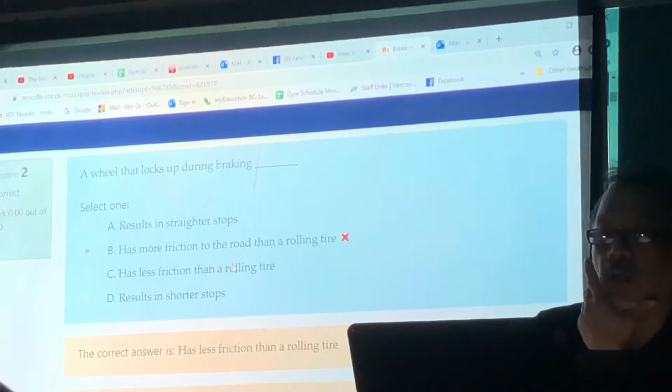Okay? A wheel that locks up during braking has more friction to the road than a rolling. Wow. You good? Good. The reason why you lock up is because you have less friction. You good? Friction is the one that stops the vehicle, right? Correct? But he's good, this mechanic.

If the weight of the car doubles, kinetic energy will double. What happened to speed? Double. Weight transfer during braking is caused by inertia, right? Inertia. Okay, here we go. Typical hanging brake pedal is a second class lever.

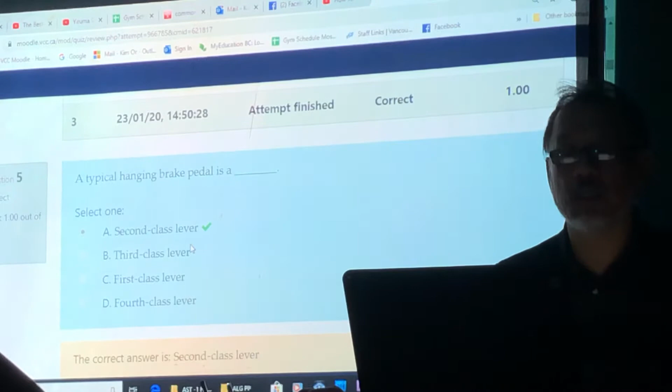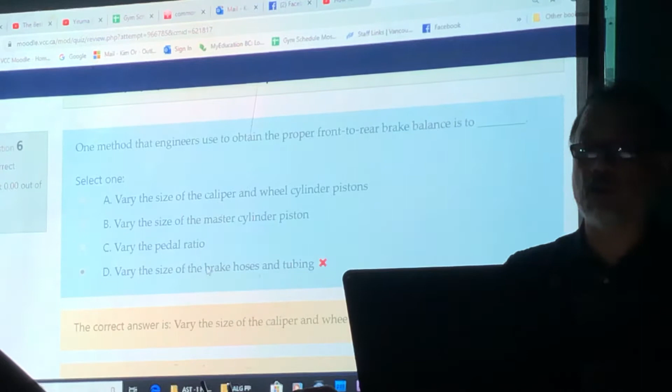Okay, hanging brake pedal. One method engineers obtain a proper front to rear brake balance is to vary the size of the caliper. As bullshit. Good. Does that make any sense? Okay, they play around with the size of the caliper and the wheel cylinder pistons. You guys good?

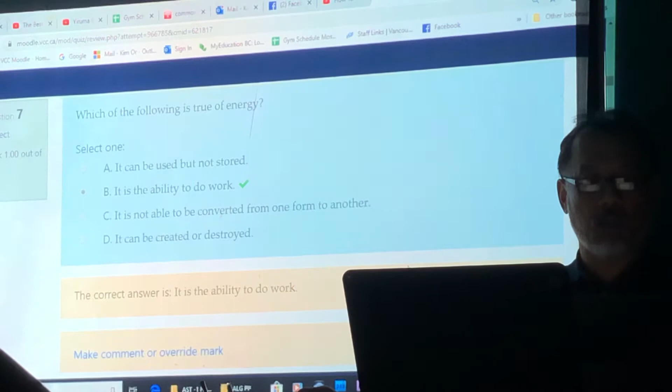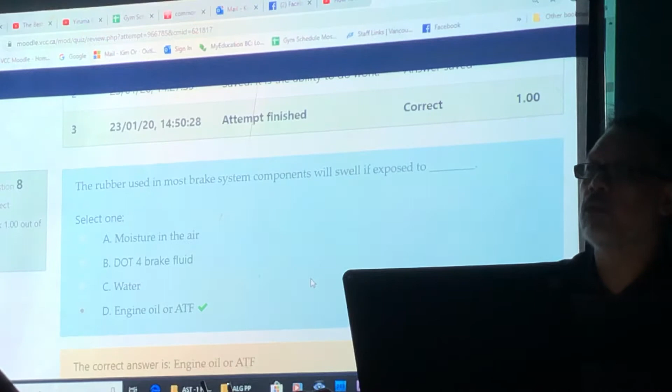Energy, the ability to do the work. You good? The rubber in most brake systems is exposed to engine oil, right? You can tell, right, when it swells? When cleaning hydraulic brake parts, use...

What the fuck do you use? Your piss? Yo, I don't. Go ahead, don't worry about it.

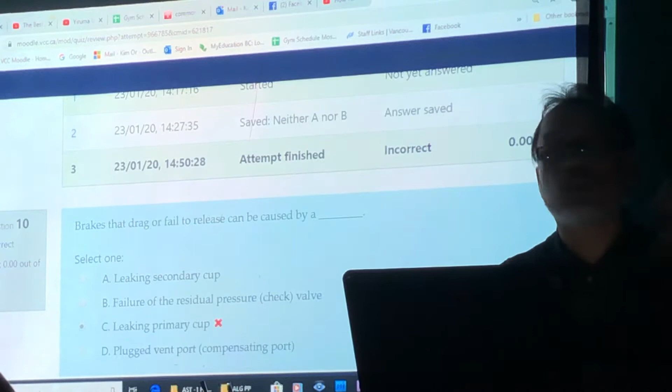I've heard enough. Brakes that drag or fail to release can be caused by a leaking primary cup. Whoa. Yeah, I'm telling you right now. By the way, just so you know, I'm not gonna lie to you, you guys are gonna have the majority of the questions in brakes. Okay, so this is basically 4. The tools ones you guys have been doing really well, they only have like 2, 3, 4, 5 questions. But the brakes, they're gonna load this thing up.

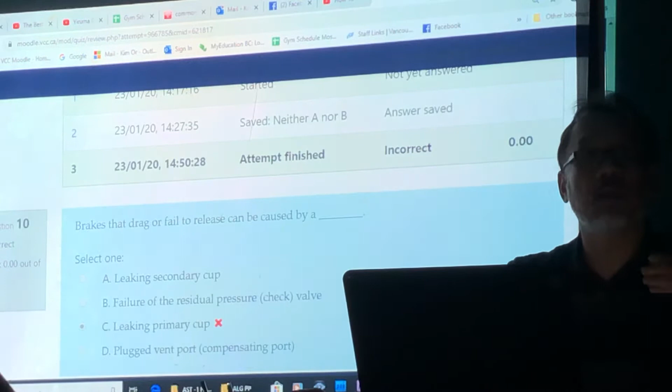What's the most questions there? Brakes and steering, suspension. How about the electrical one? Electrical. Huh? Electrical, I studied that. It's not gonna be as much as these ones. How's that? Ah shit, I studied for that. Okay, let's go. You study? Yeah. Wow. Bro. Okay, let's go. For 1 minute. You got this. Drag, fail, fine. Got 2.

Plugged compensating port. You good? How many high pressure lip seals are there in a typical master cylinder? 3. Ones that face this way, and faces that way. Self-applied brakes can occur if... good, and see, you know this one. Oh, obviously you must have guessed, no. Okay?

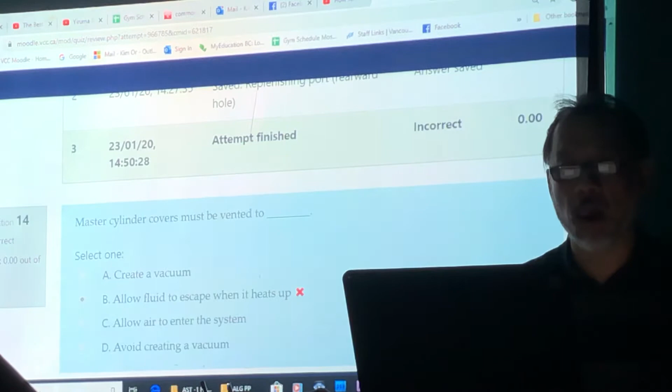If the brake pedal linkage is not adjusted properly, brake fluid may not be able to expand backwards through the what? Oh, please. 50-50. Master cylinder cover must be vented to allow fluid to escape when it heats up. What do you think? No. Create a vacuum. Huh? Prevent creating a vacuum, allow air to enter, right? So they can avoid creating a vacuum.

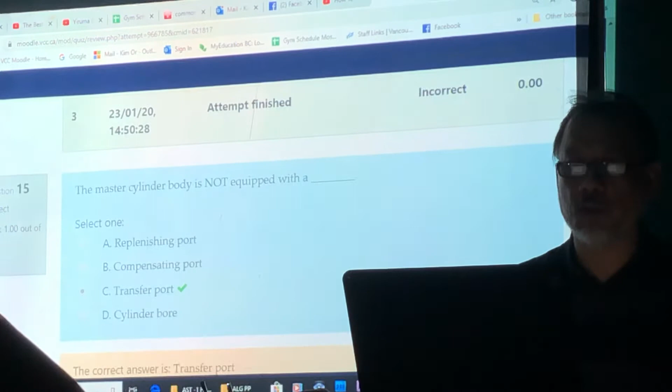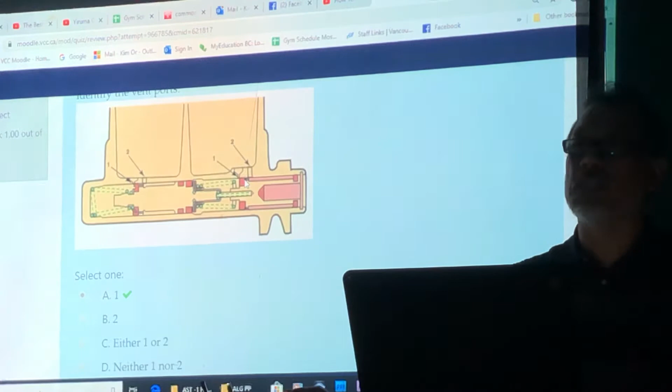This is the one that you guys gonna have to pay attention to. Remember I told you, you guys better make sure you guys know the names for these, 1 and 2. Do you remember what I talked about? When your brakes are in the what? Stationary position, it has to be between the 2. Does that make any sense? Okay. Okay. Are they brake apply? Correct?

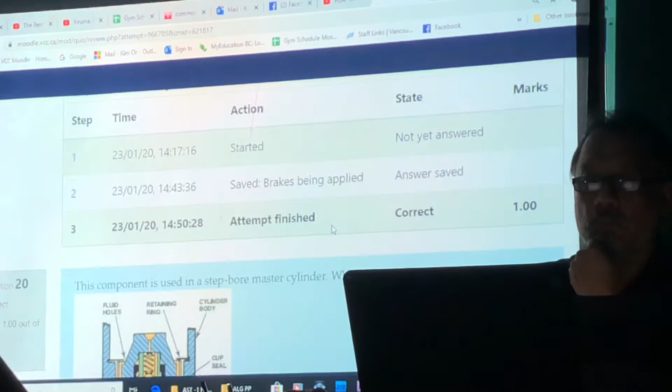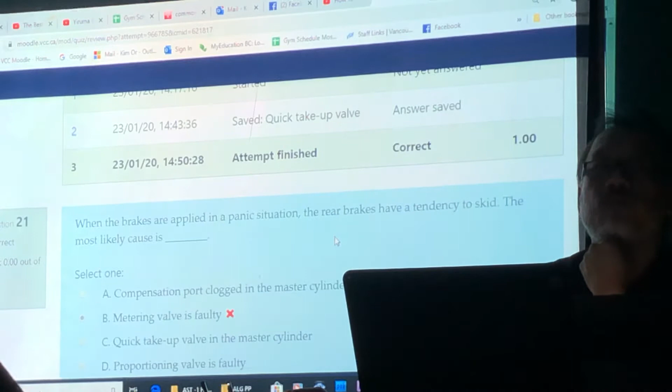What's this one called? Huh? Quick take-up. Oh, I fucking guessed it. Shit, huh? That's smart. Go. Panic situation. Proportioning valve. Huh? Fucking smart, man. Residual check valve. Residual check valve.

Anti-lock. Hmm? Used on anti-lock brakes? Used only on anti-lock brakes? Or to keep air out of the brake lines. Maybe. Under the tubing seat. Oh. What is it for? This is for wheel cylinders.

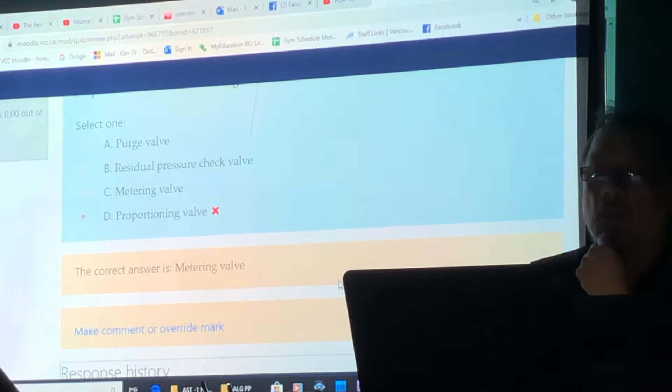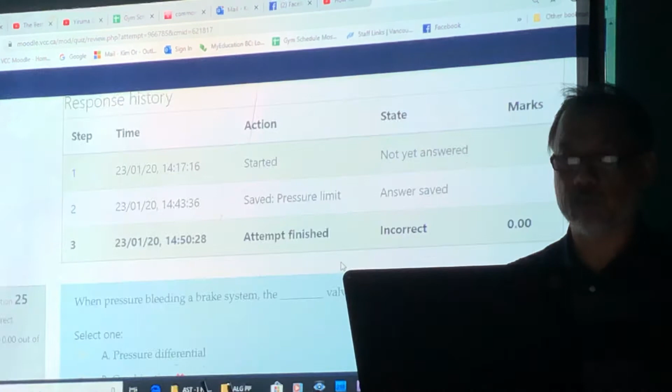When brakes are applied lightly at low speed, what type of valve keeps the front brakes from locking? Metering valve. The point at which the proportioning valve limits pressure to the rear brakes is called the... pressure limit. Limit point. Huh? Is it a limit point? Yeah, split point. Oh, fuck. When pressure bleeding this system, the valve must be held open. Which one? Proportioning. Metering.

Do you guys understand it a little bit? Huh? When you do some reading tonight? Yeah. Okay.

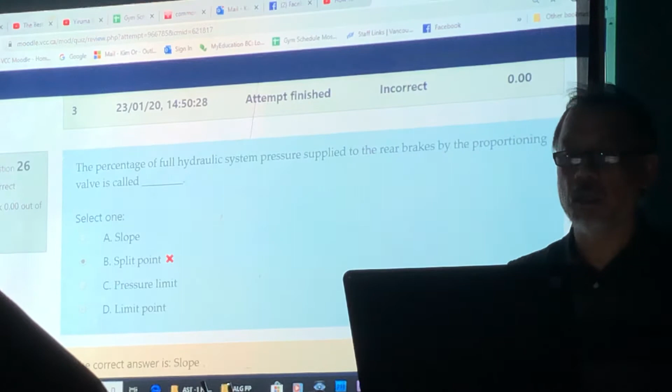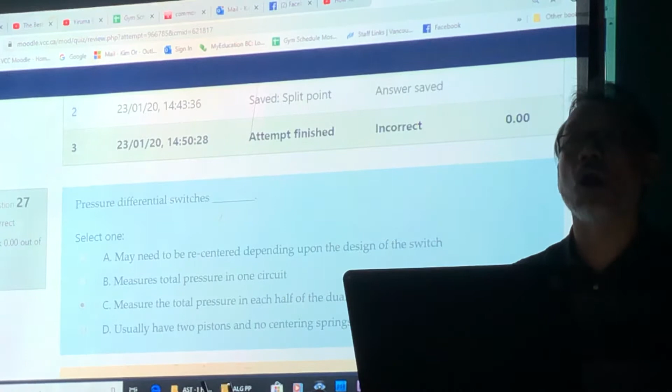Percentage of pressure at the rear brakes is called a slope. Pressure differential switch. What is it? Pressure differential switch. Differential, 2 piston. This is when something failed, right? Maybe the rear side. Right. Recenter. Differential between front and rear, right? Both A and B. Testing with a gauge that reads a maximum of 2000 psi.

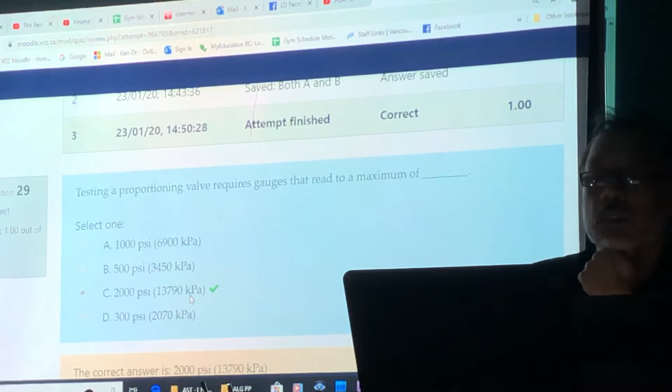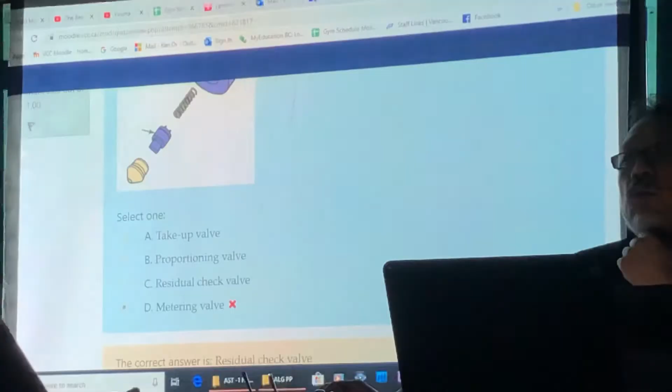That's a residual check valve. Residual check valve. Okay, this is if you have what? Wheel cylinders, right? Residual check valve.

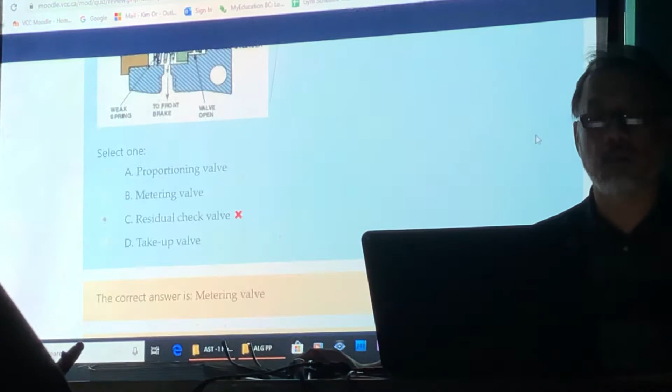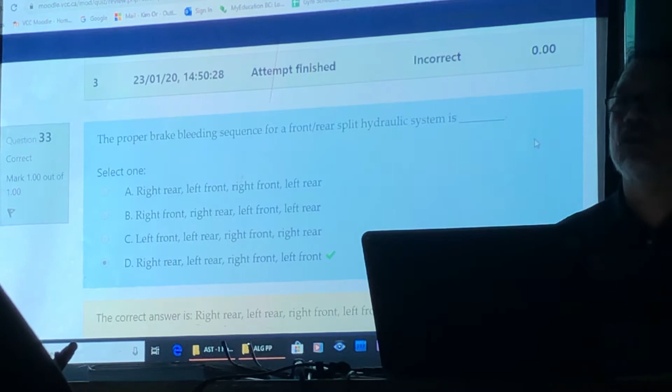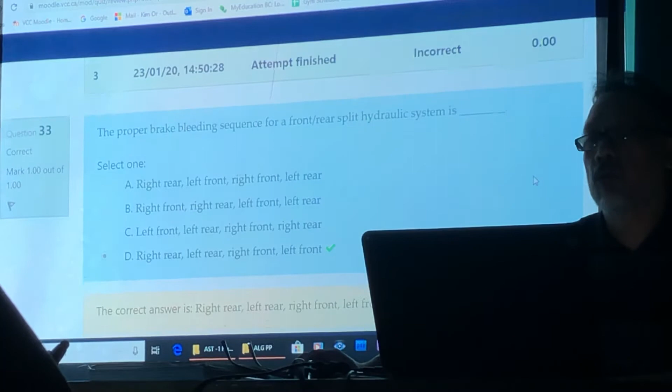This one is metering valve now, right? Metering valve. This, you guys okay, front rear split? We talk about which one do you bleed first, right? Wouldn't you wanna do it furthest away from the ABS? Huh? Furthest away from the ABS? Nah, do this for the farthest from the master cylinder. Right rear, left rear, right front. It's always like that, farthest from the master cylinder.

Why shouldn't a service tech depress the brake pedal all the way down when you're bleeding the brakes? The seal cup can be damaged. 200 IQ. Why should the bleeder be open before pushing the caliper back in the piston bore? To get rid of any trapped air? The answer is, to get rid of any trapped air, man.

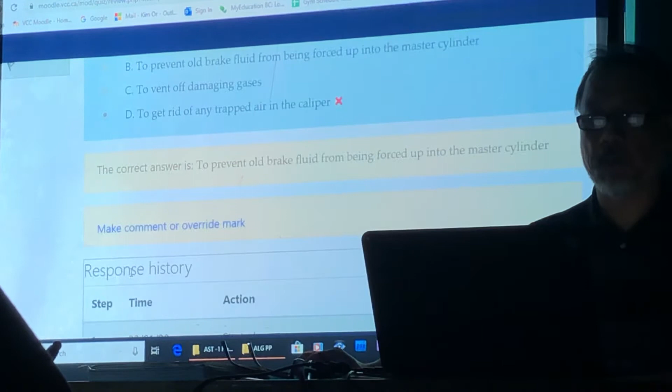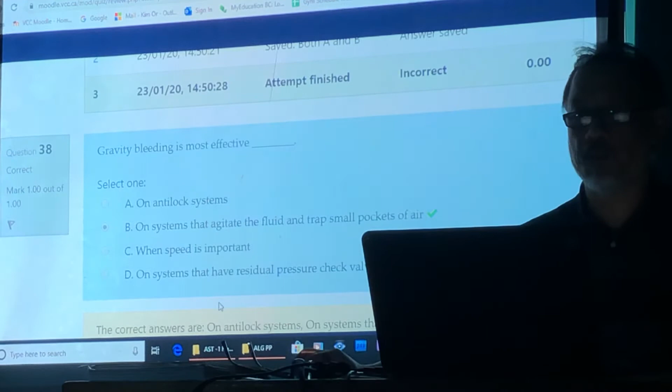In the overall bleeding, which part should be bled first? Master cylinder, and the rest? Vacuum bleeding. When we talk about the pump, the handheld one? Gravity bleeding. Gravity, can you tell me what gravity bleeding is? Jack the vehicle up, you put fluid in the master cylinder, and you release the bleeder screws, and it'll come out. Pressure bleeding.

What's he doing? Bleeding. What type of bleeding, sir? The master cylinder. What type of bleeding? What's it called? Vacuum. Vacuum, that's a vacuum pump.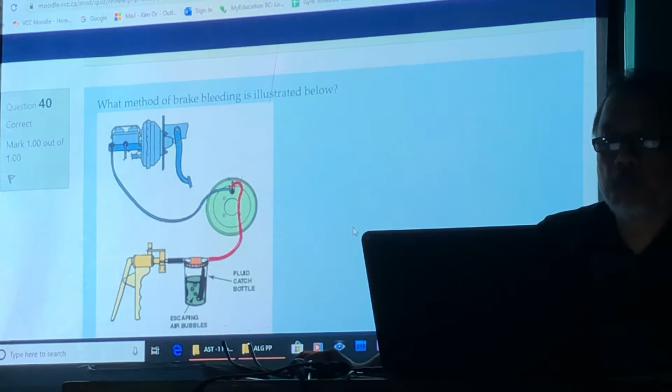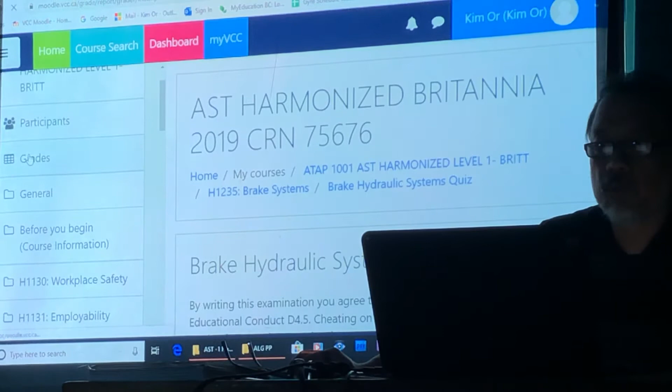Yo, I was about to say that. Why the fuck you said that, though? What? Why you thinking that? Done. Finished. He said that. Okay, cool. That's one. Raheem, so far you're doing really good right now. Thank you. Means a lot, you know?

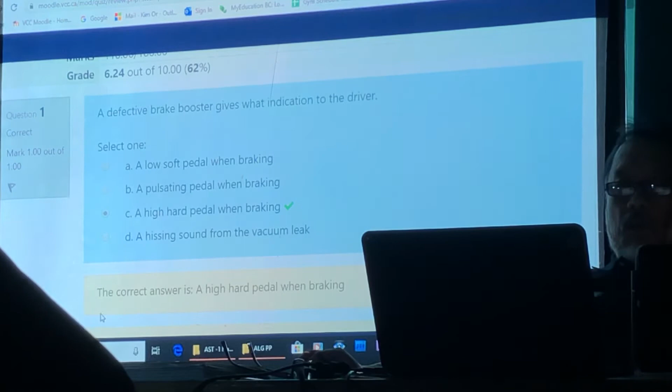You know something, since we don't have much time, we have to go right to the final exam now, okay? So we did the brakes already. Is that brakes final? Right here. Oh, good job, 62. That's great, that's better than 50. Okay, go. Let's go right to the final. A defective booster, go. Very good. A high pedal when you're braking.

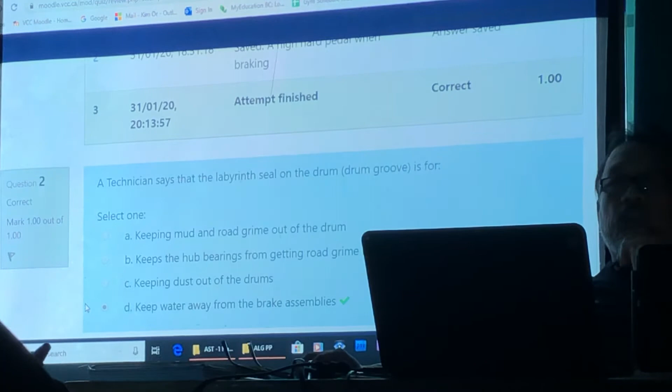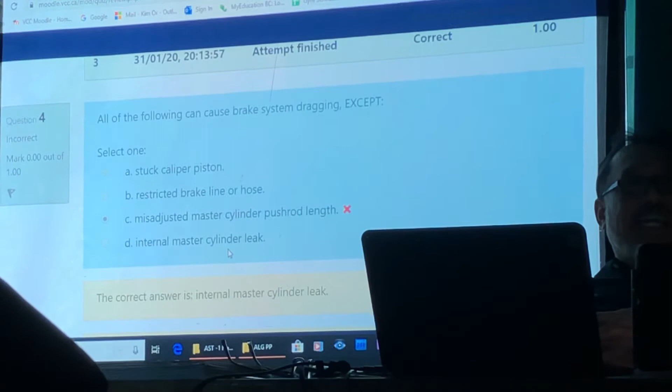The labyrinth seal keeps the water away, so somebody paid attention. Okay, labyrinth seal. I did teach you something, I hope? Yep. Good. Air, spongy, right? Good. We can skip that one, right? Air, also a little spongy. All the following can cause brake system drag except, okay? Except internal master cylinder leak. Good. Internal master cylinder leak.

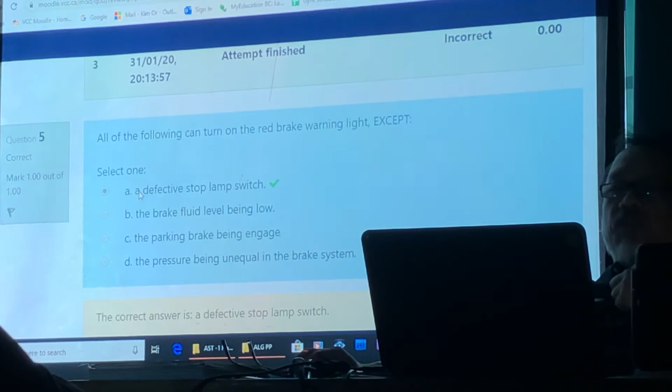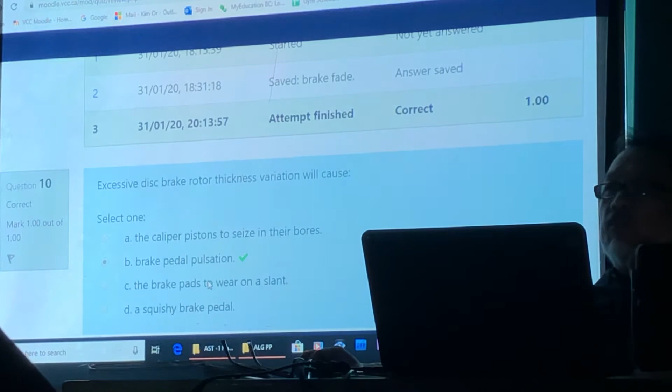When the caliper has been removed from its mounting bracket, the piston is held in its bore by... Smart, man. Genius. A brake rotor too thin cannot be handled, as we'll experience brake fade, right? Excessive disc brake rotor thickness variation will cause brake pulsation. That's why you measure the parallelism. Okay. Outside diameter, right? Brake line? That was a review one, was that?

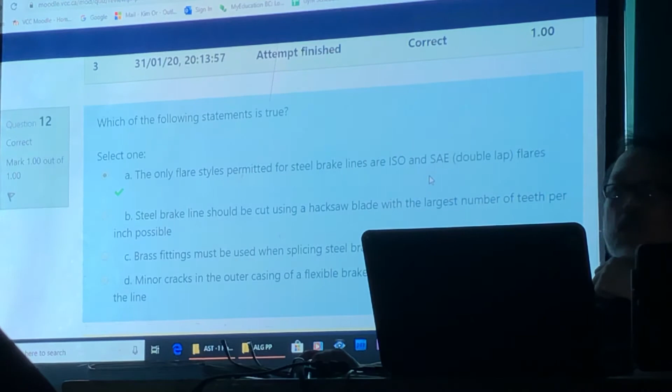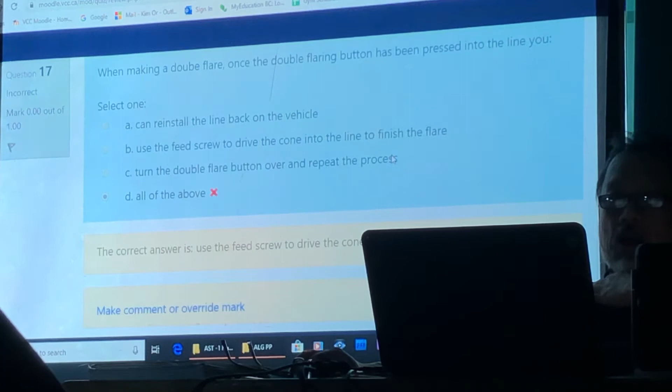When making a double flare, holy cow, you should turn the double flare button over and repeat it. Wow. You can reinstall the line back. Wow, okay. That's smart. Which of the following methods should be used to retract the piston? Special tool provided by manufacturer, that's the best one, okay? Even though you have used all of them before, the best answer is use the special tool provided by the manufacturer.

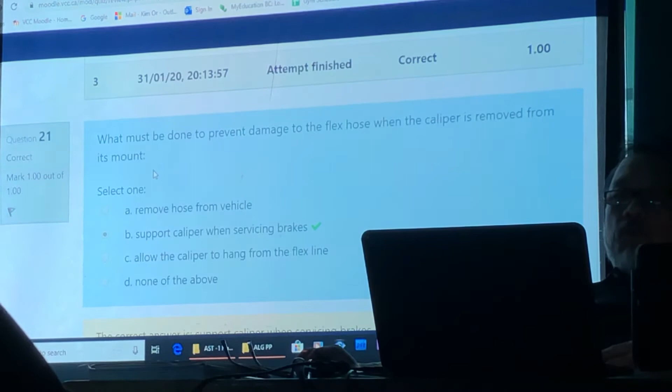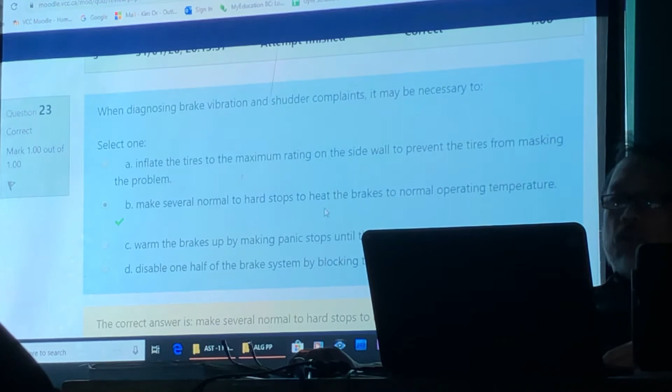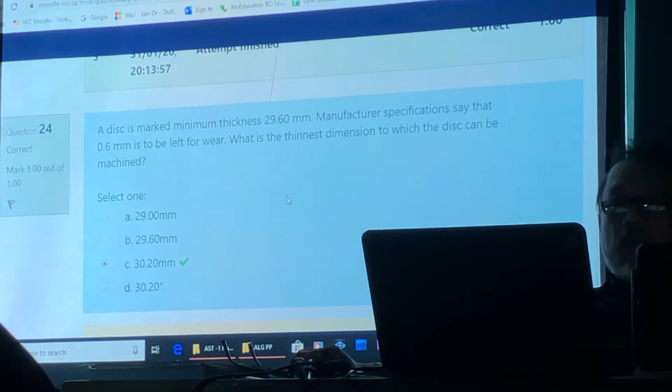The function of the rotor key, correct? Simple one. Disc brake, self-cleaning. Prevent damage to flex hose. Good. Road test, check, all of that. So overall, the simple ones, the procedure, you're pretty good. I think when it comes to the detail stuff, you kind of slacked a little bit. Okay. You need to get the vehicle to operating temperature. Oh, good. Well, at least you can do math. My girlfriend Google hooked me up.

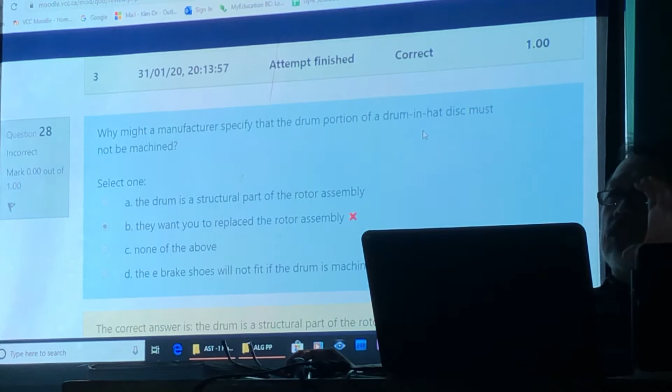So you guys know that you do not machine the drum in the hat, right? If the handbrake section wears out, correct? Did you guys know that in the perfect world, in the drum, do you know what I'm talking about, the drum in the hat? Do you know what I'm talking about, drum in the hat?

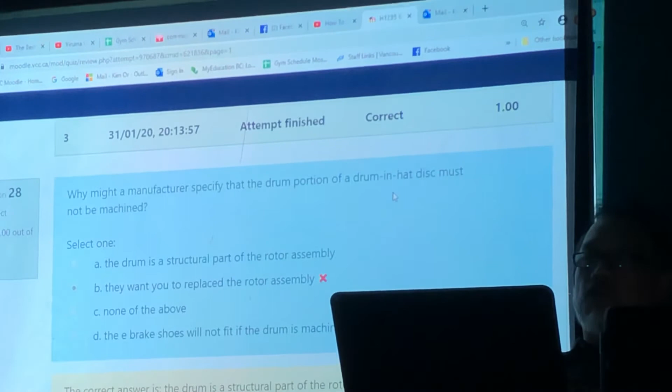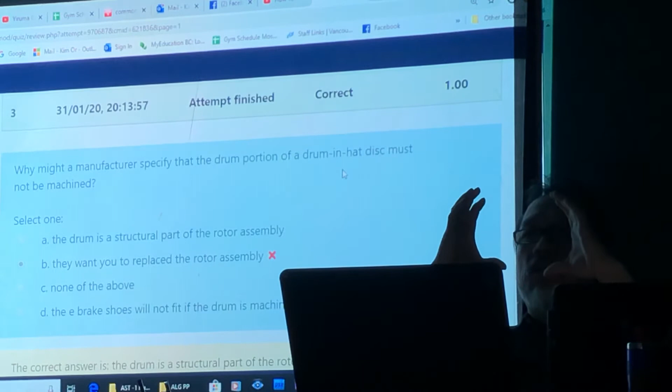What's it called? When you use a regular caliper, how do you lock up the rear rotor? E-brake. Yeah, using an e-brake, but how does it work? With a cable, if that's just a regular caliper. Yeah, okay. So inside the rotor, you have a drum in there. Oh, you're talking about the... So it's like disc brake. This is the rotor. It's actually got a drum. They call it drum in the hat.

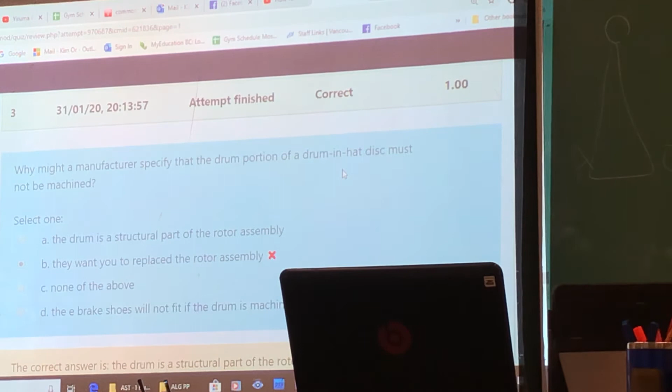So this drum here is not meant to wear out. What causes it to wear out? People drive around with what? The e-brake on. Handbrakes on. That's why this thing here is not meant to be machined. If you drive correctly, should the brake pads in here be worn out? It should be brand new for the duration of it. Because all you do when the car stops, you put what? Handbrake, this one comes out, locks it. Does that make any sense? Good job.

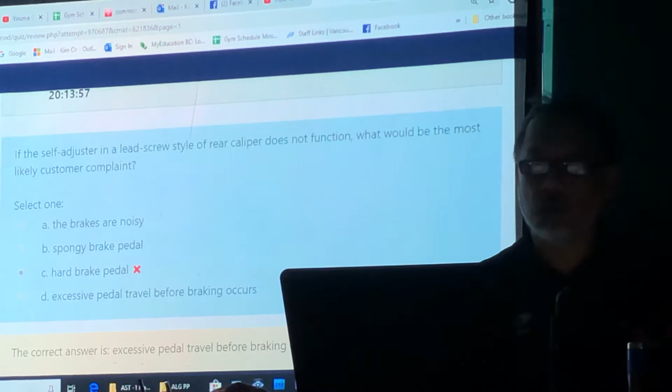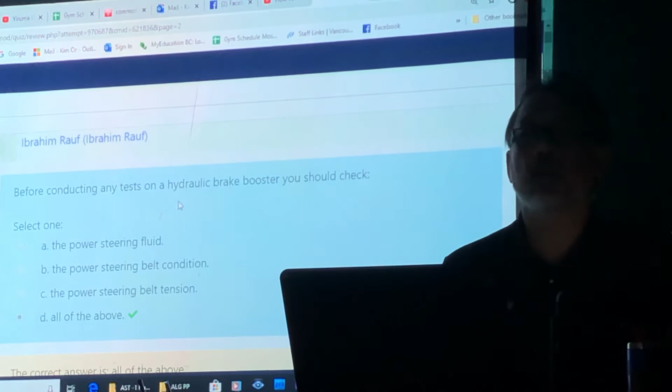Okay. Does not function. Excessive pedal, right? Vacuum and hydraulic. As a brake booster, we have two types. Which is the most common? Vacuum booster is the most common. What's the name for the hydraulic brake booster? What do we call it? Called hydro boost, right? Hydro boost.

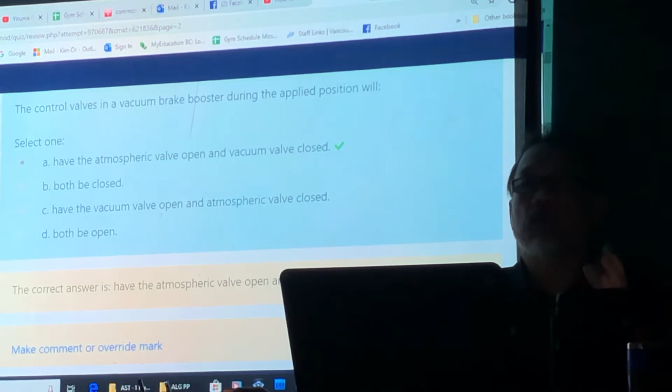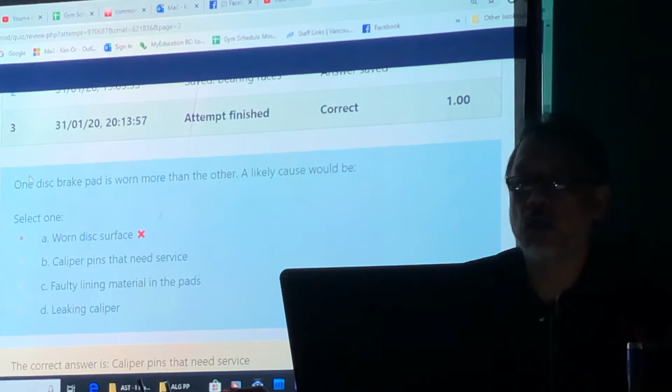Remember I showed you the animation about the vacuum port and the atmospheric port? You need to study that. I just don't have the time to teach it. Disc brake pads wear one more than another. The likely cause could be a caliper that needs servicing. Does that make any sense? Stuck?

I need to finish the whole thing. I'm assuming that when you got the right ones, you're paying attention. I'll go to the ones that he's wrong, okay? I have to get this done by 12. That way I'll give you an hour and a half to mount your engine back. Okay, good.

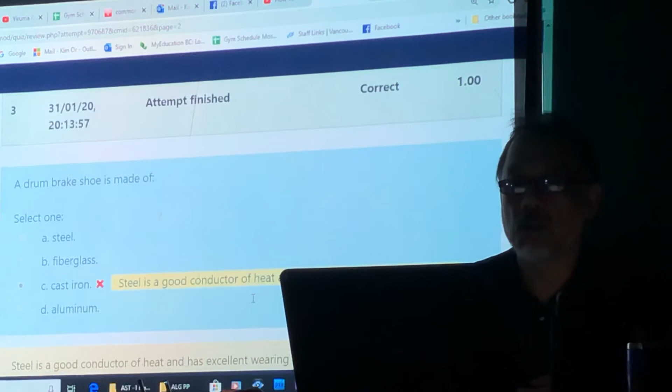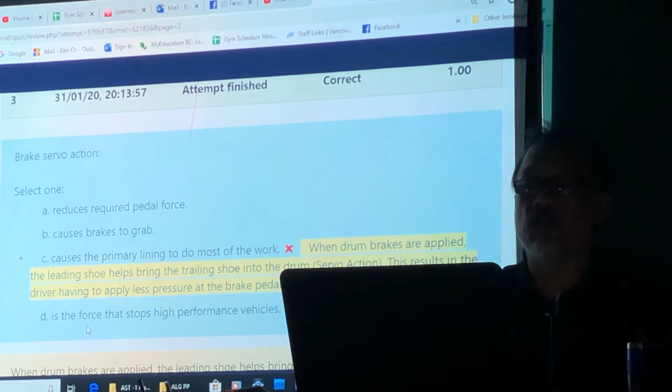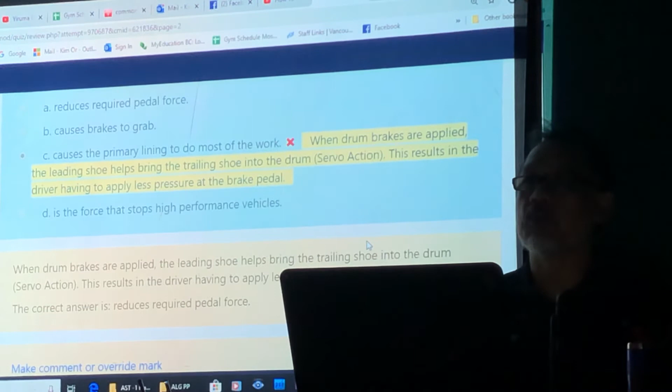Drum brake shoes made out of steel. The brake shoe is steel, but the drum is made out of what? Cast iron. Brake servo. I'll let you read it. The purpose of the servo is so that the primary can help the secondary. Where's the anchor pin on a servo? Top. Good.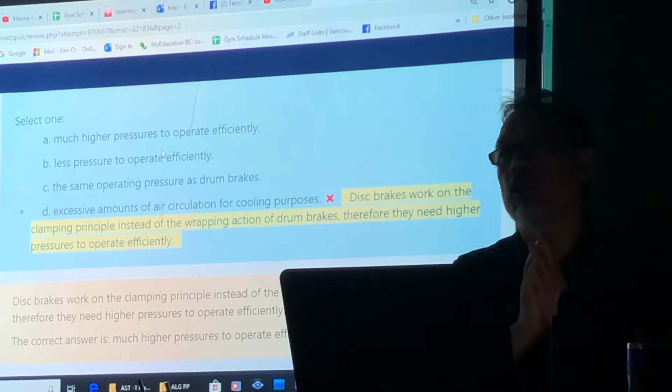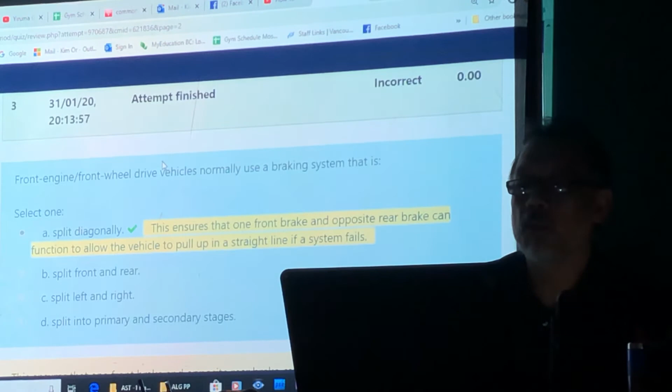Compressed air, dangerous to the health. Disc brake needs much higher pressure to operate, correct? Because of the surface area of brake pads versus brake shoe. And because of that, we need a power booster. So when you get it right, I'm gonna speed it up. You just have to go review those booster, okay?

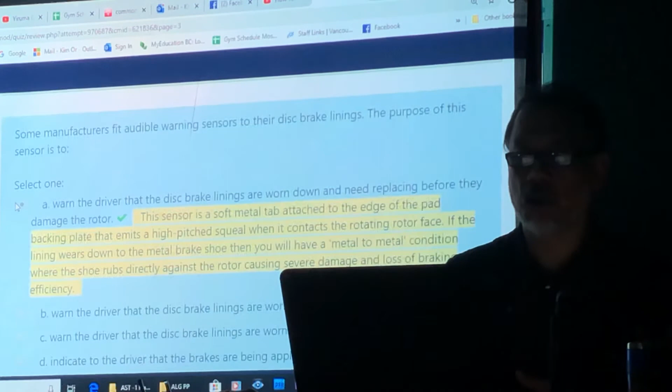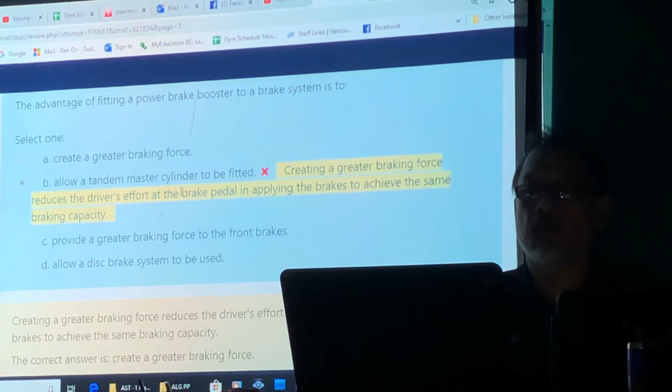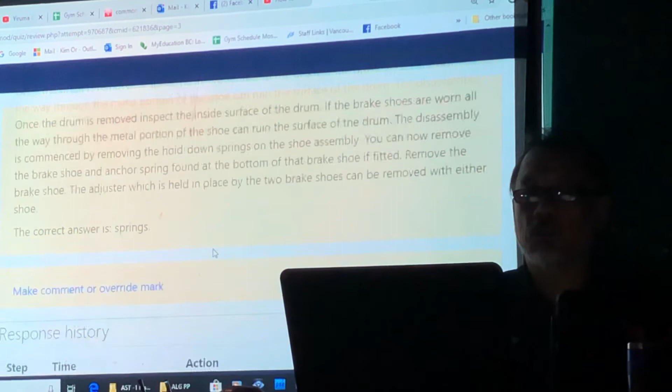Greater power brakes, greater force. The backing plate supports basically all of them. Brake pedal. I'm just gonna go through the stuff that he got wrong. Proportioning valve. Again, these are all proportioning valve. I want you guys to go through this yourself, because I need to go to suspension too, gentlemen.

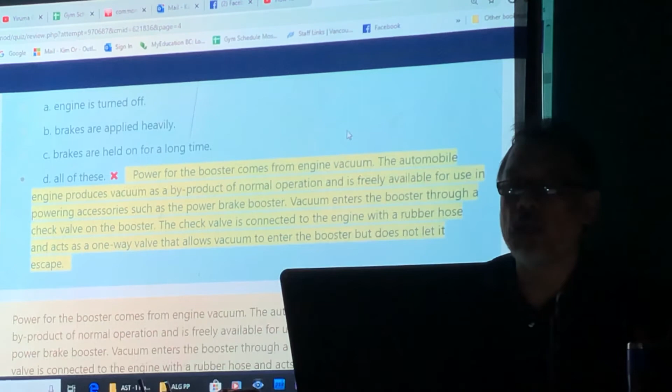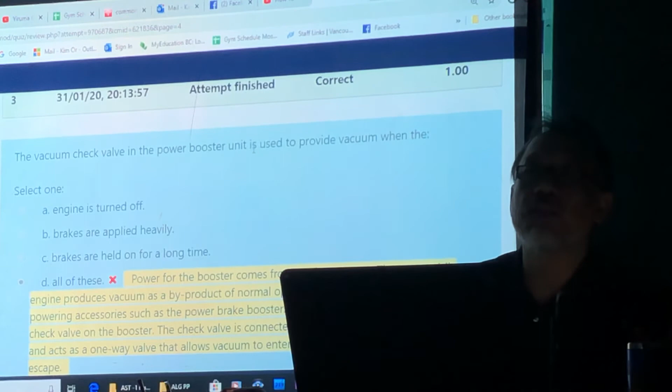Major components. Attached to the firewall, the vacuum check valve is used to provide vacuum when the engine is turned off, like when the car stalls. How many pumps does it give you? 1 and a bit, right? Vacuum booster is actuated and operated by what? Control valve. The brake pedal controls it.

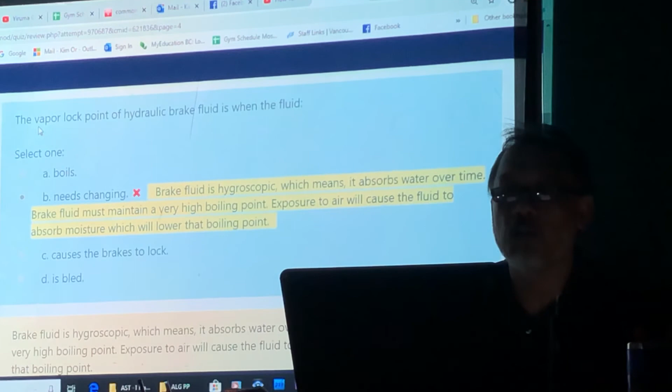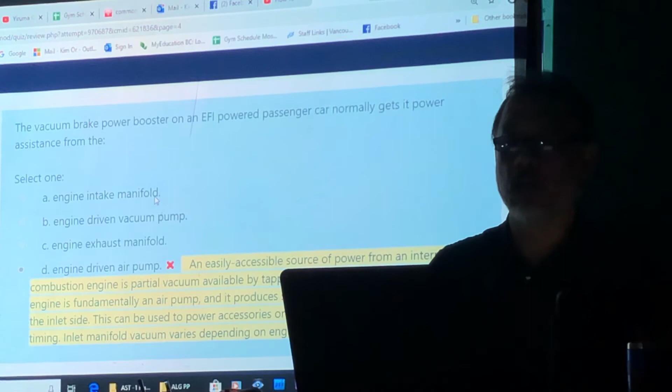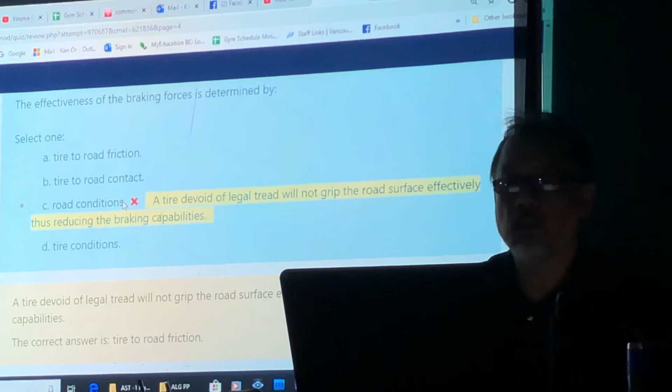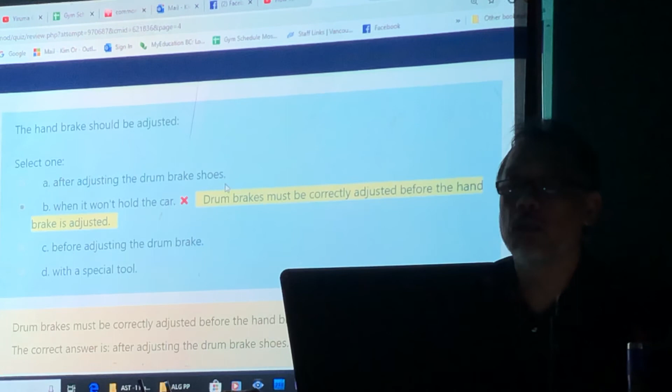Vapor lock: fluid boils. The vacuum brake booster on an electronic fuel injection engine gets its power from where? Engine intake manifold. It generates the vacuum. Brake line made out of steel, good. Moisture. The handbrake should be adjusted when it won't hold the car, after adjusting the rear drum brake. But if it's done properly, should you ever have to adjust the handbrake? You shouldn't.

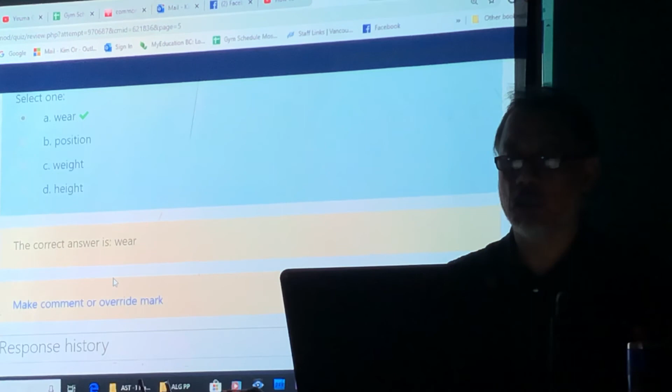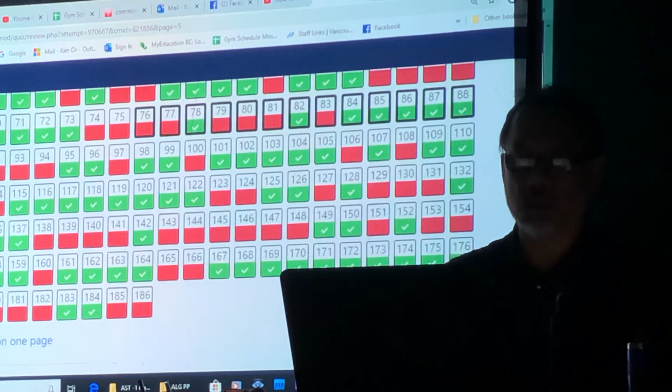Is this the one with tons of questions? 180 questions. Not bad, 60% for 180 questions. Let me take a look. I don't know if I can go through all of these. 186. Some of them repeat? Okay, then forget it. So you guys okay on the brakes? So now let's go to the big one, suspensions and steering, and then we're done.